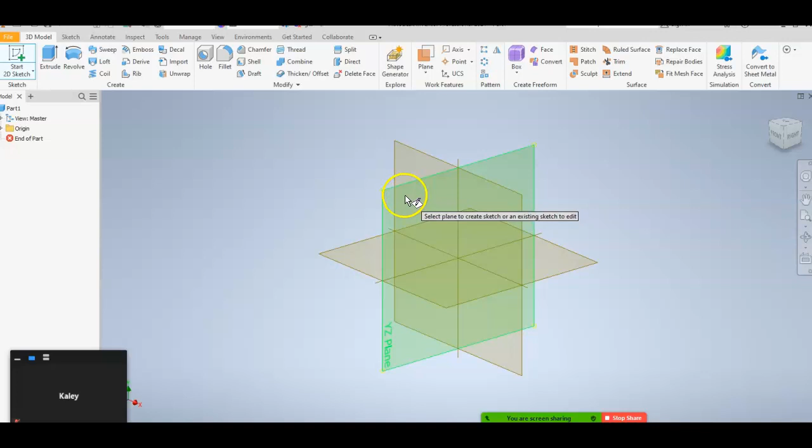Again, I did it in millimeters. You want a standard part. As far as the plane, it doesn't really matter. I'm going to do it on my, I don't know, XY plane.

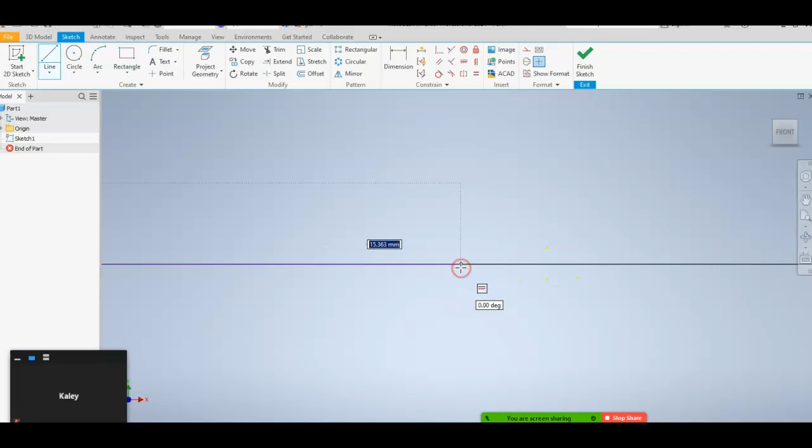To get practice with revolve, I'm going to do it the same way I did on the last one. I'm going to draw the profile of one side and revolve it around. So I'm going to start at the origin, and make a line for my overall length, which is going to be 100.

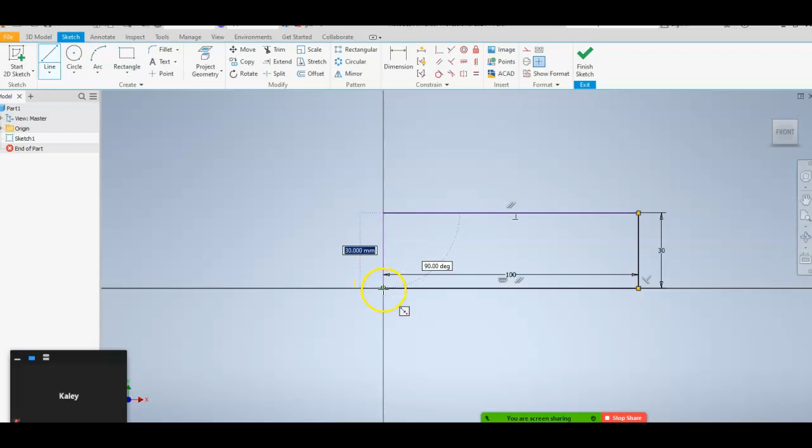Then the big diameter is 60, so I'm going to go up half of that, so 30. So I made a 30 by 100 rectangle.

Starting from the origin again, the hole in the middle is 40. So again, I'm going to go up half of that, so I'll go up 20. And then the width of that section is 20.

So I started from the origin, went up 20, then went over 20, then connected back down to my middle axis.

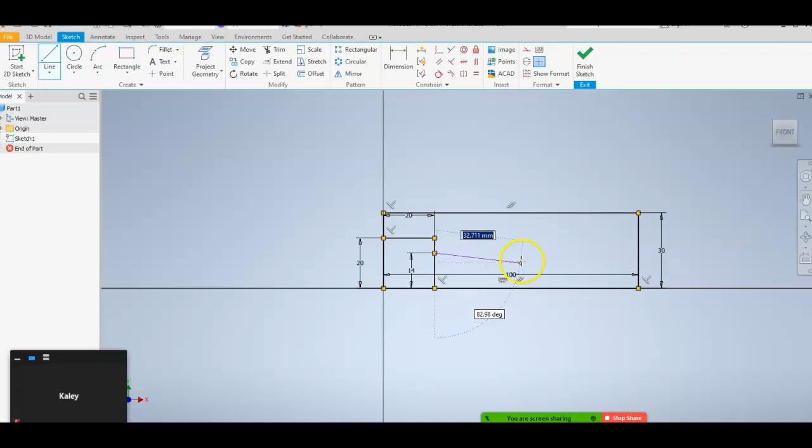The smaller hole is 28, so I'm going to go up 14. And it's going to go over 60.

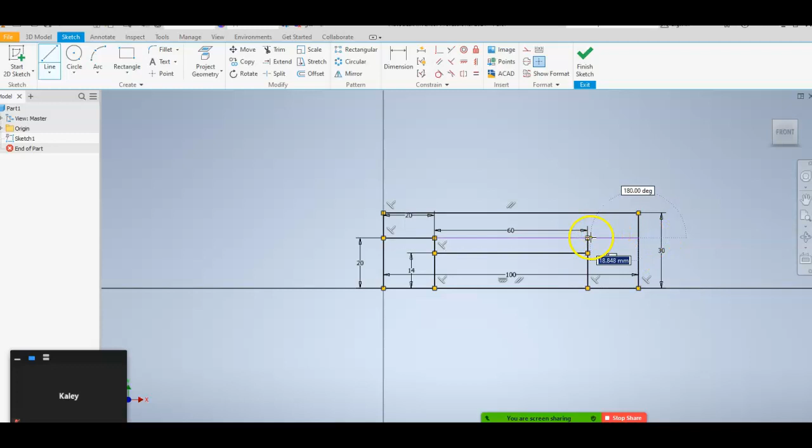On the far side, after I did the 14 up and 60 over, I did another 20 by 20. I'm going to finish sketch.

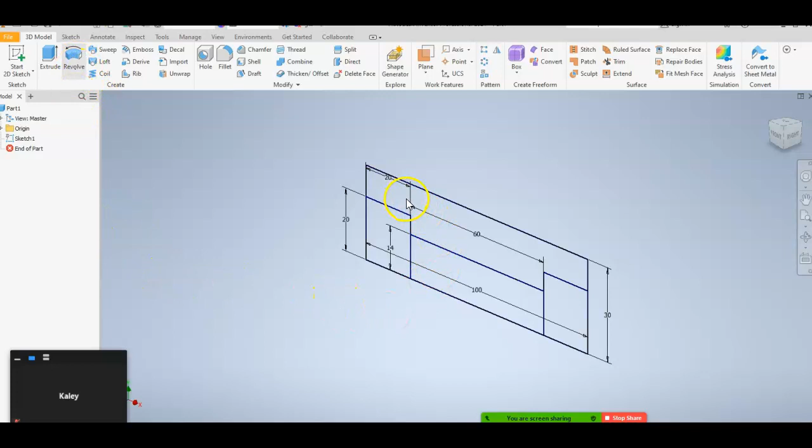I'm going to pick the profile that I want to revolve around. Pick my axis.

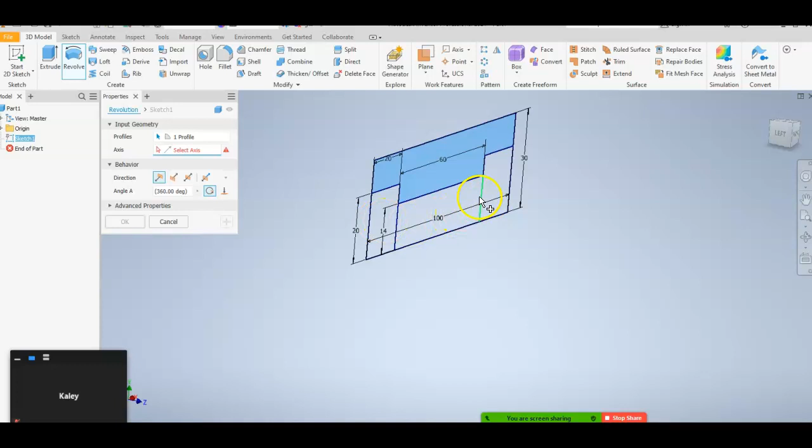All right, once you have the cylinder made, there are a bunch of holes that we need to cut through, drill through.

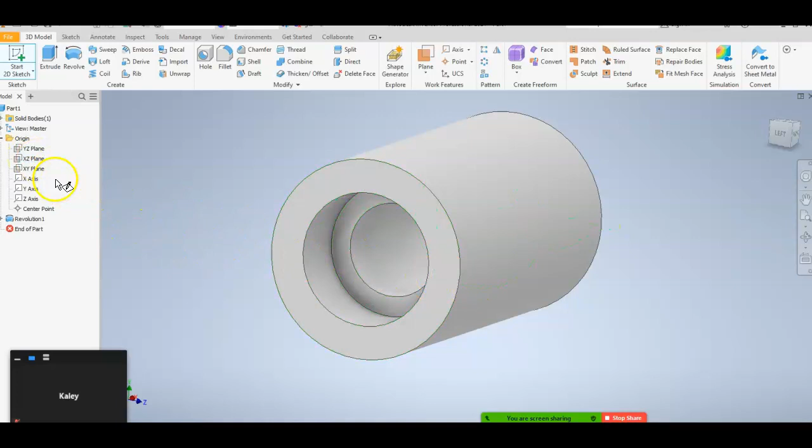So I'm going to do a sketch. I'm going to click on the plus sign next to origin so I can see my origin planes. I want a plane that's going to cut through my cylinder, so not my YZ. I'm going to select either XY or XZ. Either one doesn't really matter.

Again, I hit F7 to cut away where the plane is so I can see exactly where I'm drawing.

Wait, I don't remember how you did that one. Oh no! Where'd it go? No, where'd it go? We're not.

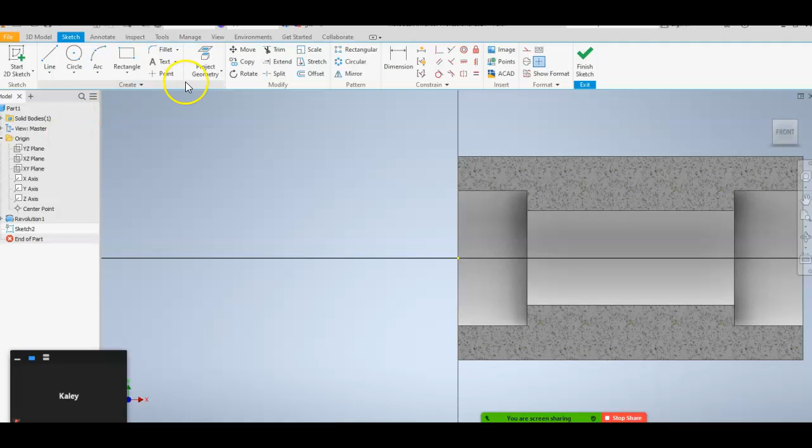Alright, once I'm in the sketch— wait, hold on. Like, mine just crashed. No, one circle. I can't do that wrong. Oh well, I'm gonna correct it. And then when you press F7, yeah, F7. Not like the letter F and the number 7, the button that's F7. Oh.

Alright, I'm going to do the hole that's closer to the end here. I'm going to line it up with my origin. I'm just going to come over a little bit. I'll use dimension to get the exact spot. These holes are going to be 6 in diameter.

And they are 10 in from the front edge.

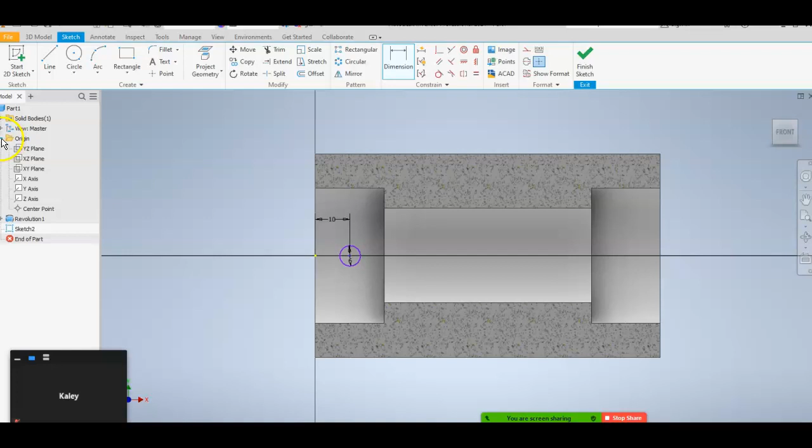Well, yes. How do you get to that view there? Where you're on—go over here on the side in the model tree, click on the plus sign next to origin and you'll get your planes.

Then you'll want to select the plane that is going to cut through horizontally your cylinder. Say, 2 of the 3 planes should do that. And then you hit F7.

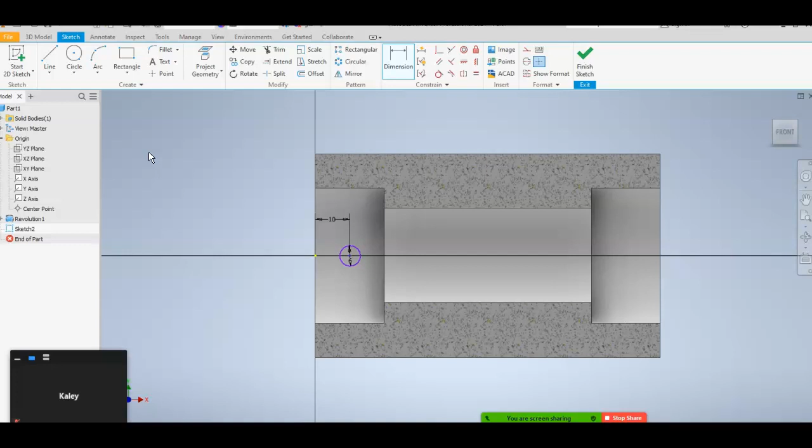Once I have just one laid out in here, I'm going to click Finish Sketch. I'm going to extrude, cut. I'm going to go all the way through.

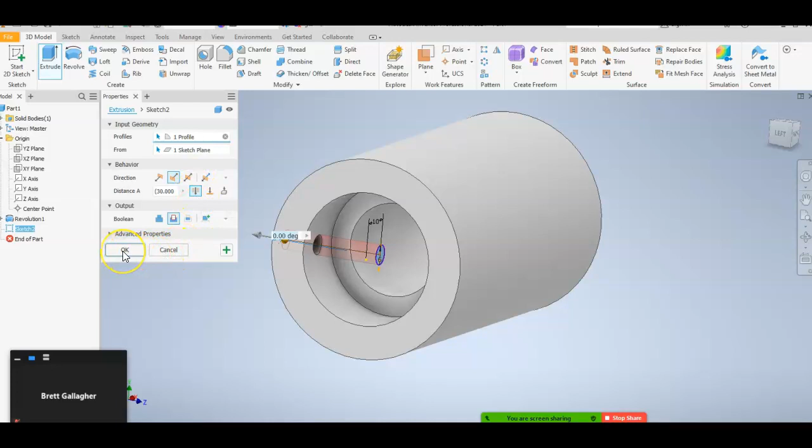Just pick one of the sides, because we're going to end up using pattern to make the copies going around.

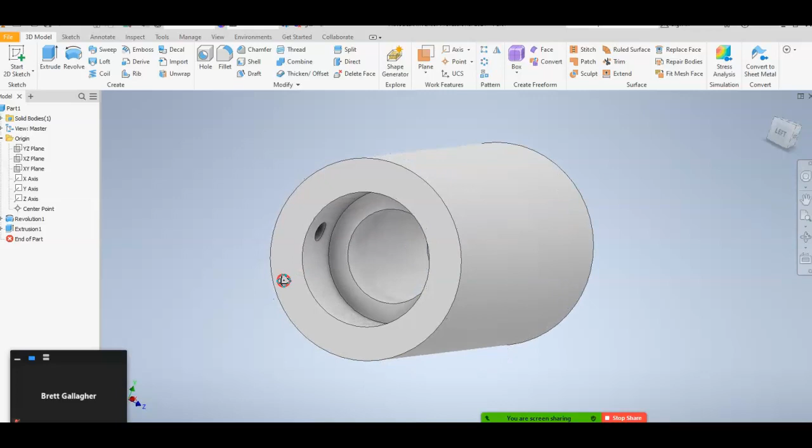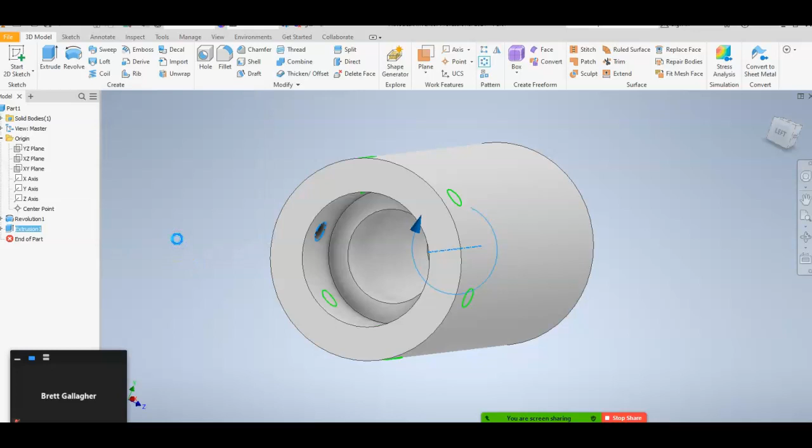So I cut the hole through one side. I'm going to use circular pattern. I'm going to select the hole, click on the arrow for the axis, and pick the big cylinder. On the paper it tells me there are 6 of them, and it defaults to 6, so I'll hit OK. It will copy and space the holes out all the way around.

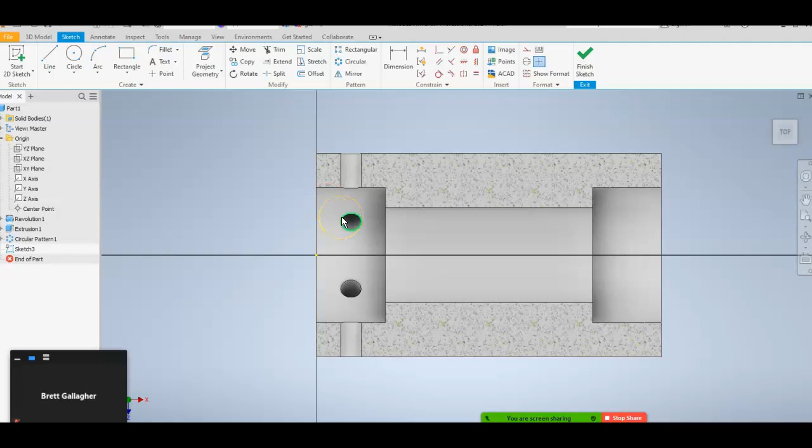Alright, for this one, once I have my view selected, I'm going to have to do 2 different sketches, and we'll use a new command because they're on an angle.

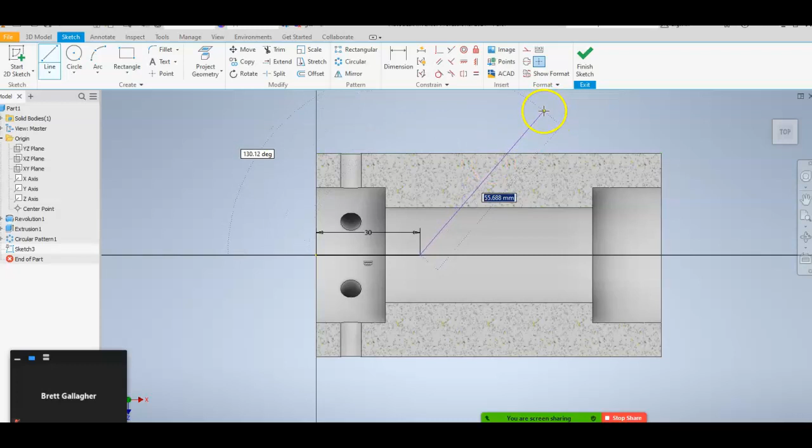So I'm going to start a line on the origin. I'm going to come back to the right 30 millimeters, and then I'm going to draw an angled line. I'm going to make it long, and I just made it at a goofy angle because I'm going to use dimension, since on the paper it tells me from vertical it should be 30 degrees.

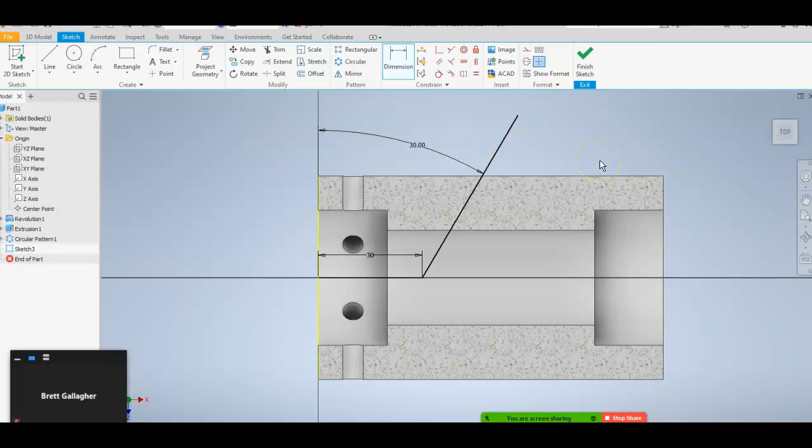So I drew a line 30 millimeters in, then I drew it long, then I used dimension to get it at the right angle. The button that says dimension - click on a reference. I drew a line in, and I drew a line going out, and I used dimension to get the right angle.

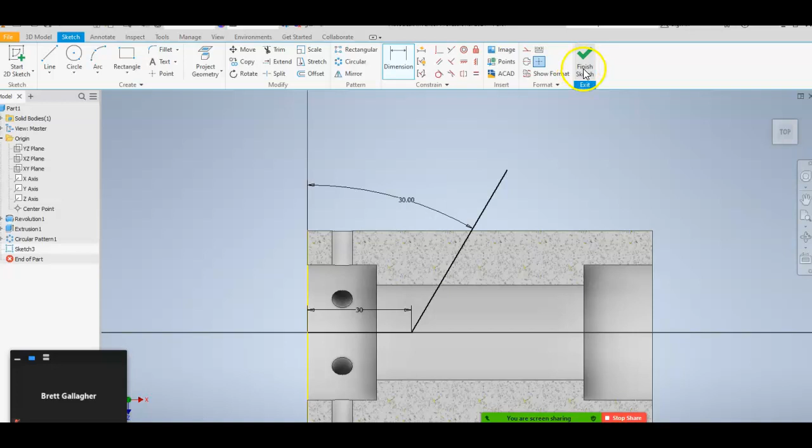Alright, so this sketch is done, so I'm going to click Finish Sketch. Now I'm going to do the second part.

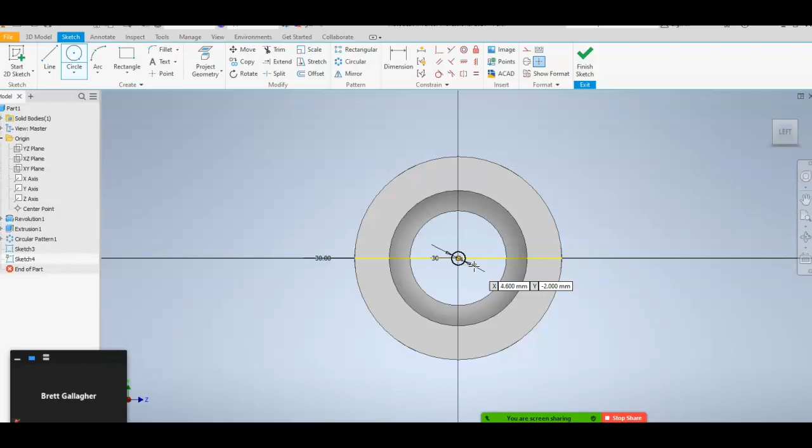I'm going to select this front surface to do a sketch on, and on the origin in the middle, I'm going to do a 4 millimeter circle. Then click Finish Sketch. So on the end of that 30 millimeter line, I have a little 4 millimeter circle.

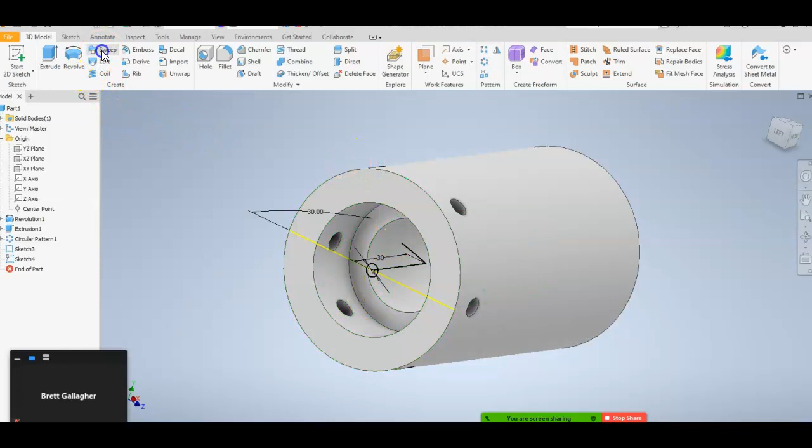Alright, once I have these two sketches, and they have to be on separate sketches because there's no way to do them all in one, I'm not going to use extrude, I'm not going to use revolve, I'm going to do a new command, and it's going to use sweep. What sweep does is, if you have a closed profile and a path, it will take that profile and take it along the path. So if I click sweep, it wants... mine already auto-selected the profile because there's only one closed shape in a sketch.

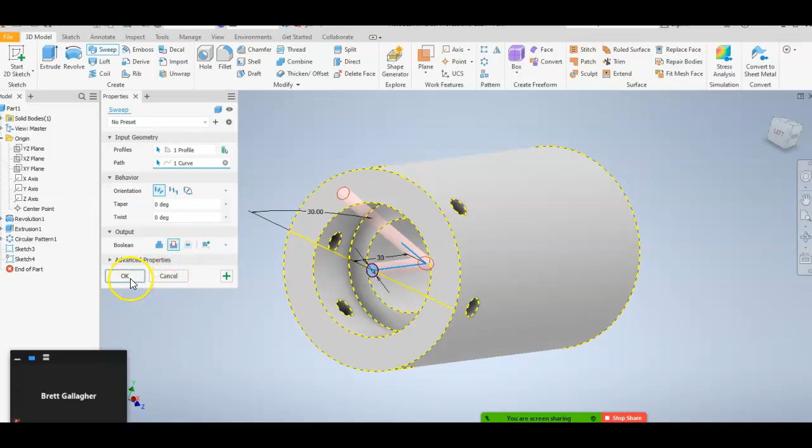So it already selected that for me. It wants me to select my path now, so if I click on the angled line, I'm going to leave the behavior alone because I'm not changing it at all. And down here at output, I want to change it to cut. Then I hit OK, and it will take that circle, sweep it along that path, and use it to cut out the circle on the angle. It's 4 millimeters in diameter.

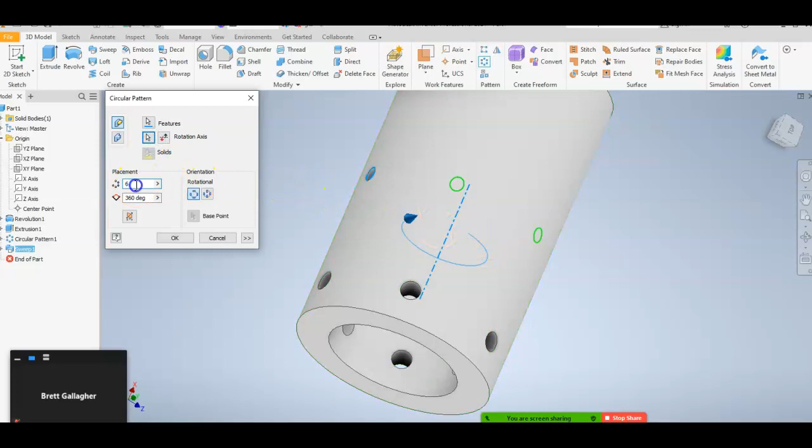Alright, once I have the one angled hole, I'm going to use circular pattern again. I'm going to click on the hole I just made. My rotation axis, I'm going to pick the big cylinder. This time there's not 6 of them, there's only going to be 4.

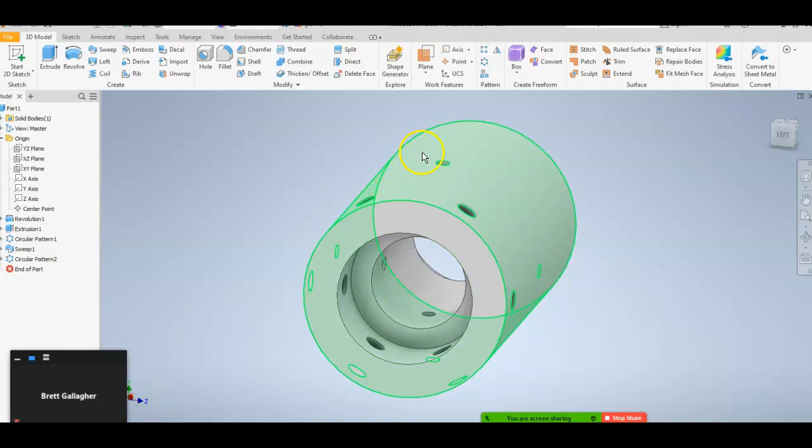Once you do your circular pattern for the smaller angled holes, the part's all done. So I'll save.

Nozzle. And then I'll do an ANSI millimeter drawing. I saved it as nozzle.

Is this - are the smaller circles, are they also 6? It's 4 of them.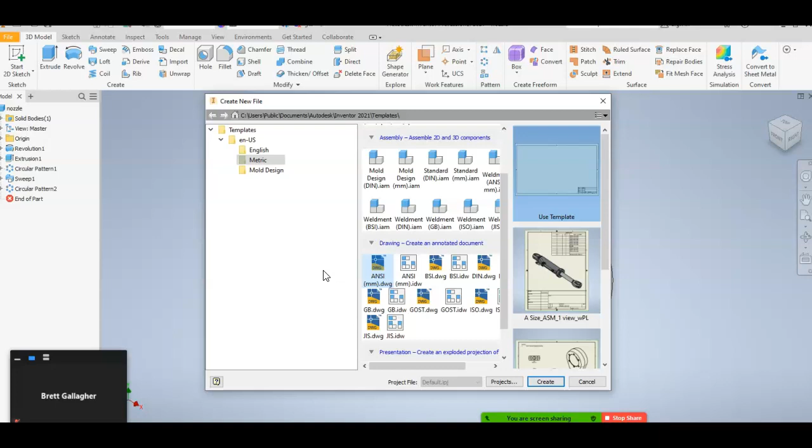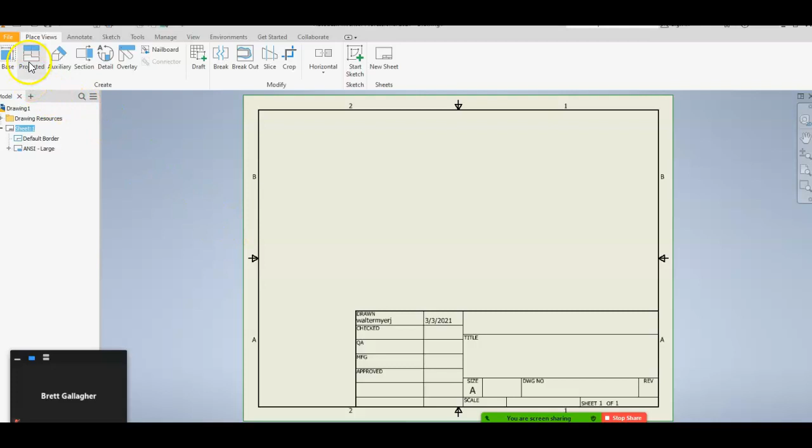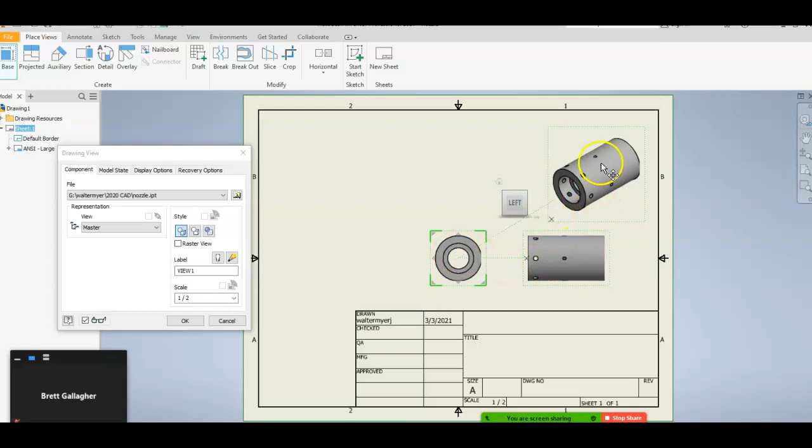Alright, so I'll do two normal views, my ISO - I did it at half scale - and then I'll do a section view. Oh wait, I don't remember the whole section.

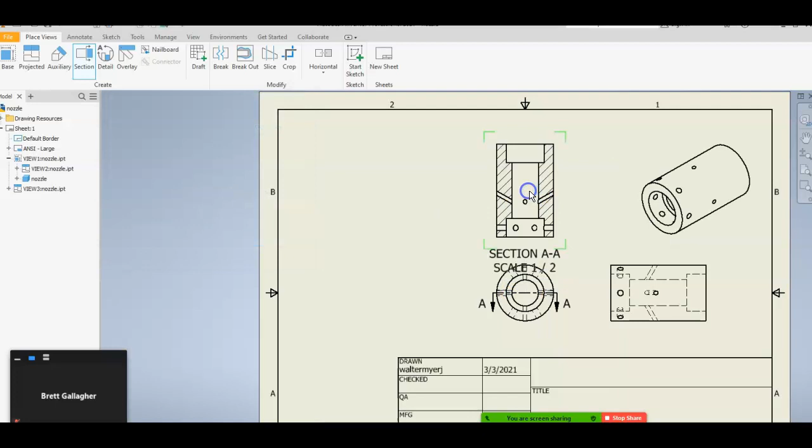Press section, click this, and then what? Whoa, wait, I can do that. So I clicked section, clicked my view, drew my section line, right clicked, then continue or create, and I pulled up to make my section view on top.

Now I can go through and add in my dimensions.